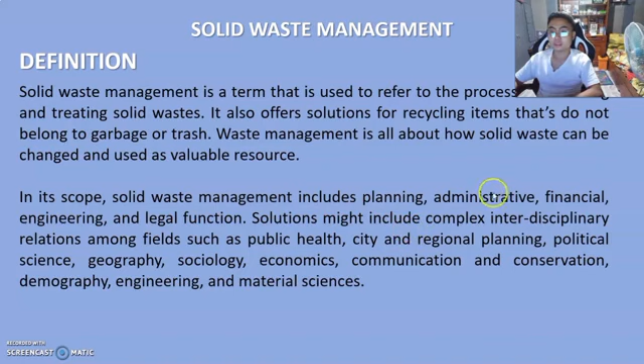Yan, mga usually non-recyclable. Its scope includes planning, administrative, financial, engineering, and etc.

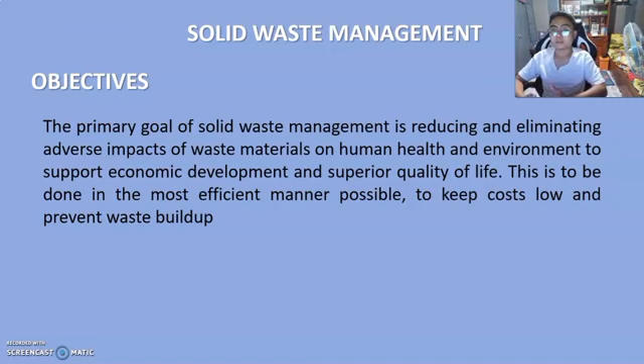There are 6 stages of the waste management system. The first is waste generation, where they identify materials that are no longer usable.

Next is on-site handling, storage and processing. Here, they have a dedicated place for solid waste to facilitate easier collection.

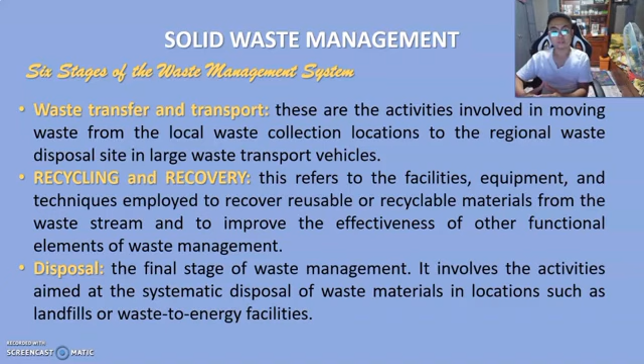Next is disposal, the final stage of waste management. It involves activities aimed at the systematic disposal of waste material in locations such as landfills or waste to energy facilities.

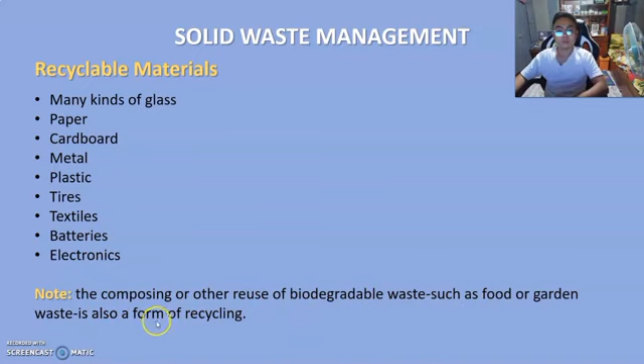Next are recyclable materials, the ones usually recycled: many kinds of glass, paper, cardboard, metal, plastic, tires, textiles, batteries, electronics. Note that composting or other reuse of biodegradable waste such as food or garden waste is also a form of recycling.

Next are non-recyclable materials: plastic bags or recyclables inside plastic bags, takeaway coffee cups, disposable nappies, garden waste, polystyrene or foam, bubble wrap, syringes or medical waste, dead animals, oils, ceramics, ovenware, or light bulbs.

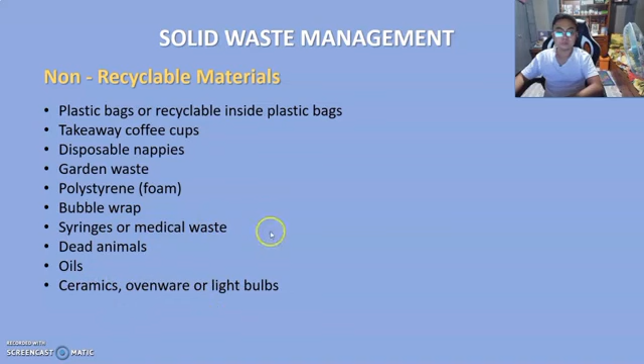Next is the benefits of recycling: it reduces the amount of waste sent to landfills and incinerators, conserves natural resources such as timber, water, and minerals, increases economic security by tapping a domestic source of materials, saves energy, supports manufacturing and conserves valuable resources, and helps create jobs in the recycling and manufacturing industries.

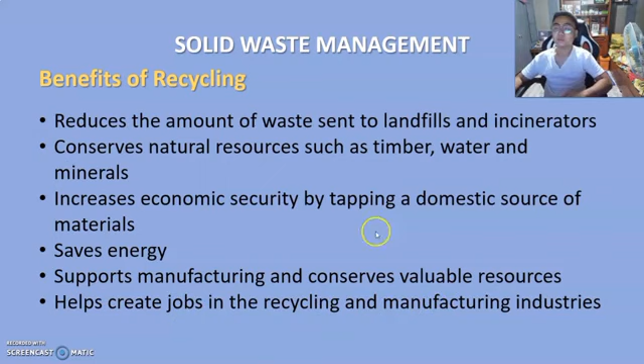Solid waste management accomplishes a lot. Next is the Philippine government. The Philippines has endeavored to improve the management of solid waste through the passage of RA 9003, or the Ecological Solid Waste Management Act, which provides for a systematic, comprehensive, and ecological waste management program to ensure the protection of public health and the environment. So the Philippine government improved our solid waste management.

Next, our topic is all about global warming and climate change. Global warming occurs when too much carbon dioxide and air pollutants are present in the atmosphere.

These pollutants get trapped on Earth and can last for years, even centuries, in the atmosphere. Because of that, they get trapped and generate heat, causing the greenhouse effect. Carbon dioxide, methane, nitrous oxide, water vapor, and synthetic fluorinated gases are known as greenhouse gases.

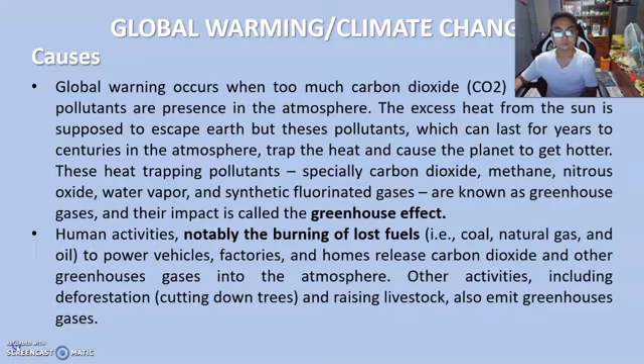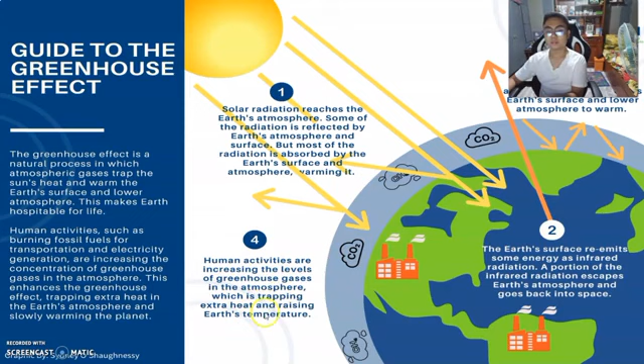Next is global warming and climate change impact. Because of human activities, there is an impact on our planet. This includes intense and frequent droughts and storms, melting glaciers and ice sheets, rising sea levels, warming oceans, and ocean acidification. People around the world are already feeling the impact of climate change on the environment.

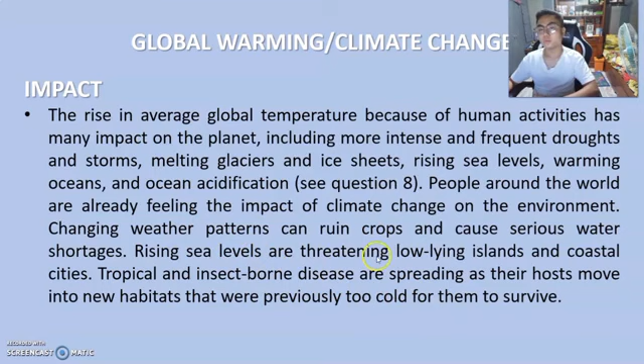Rising sea levels are threatening low-lying islands and coastal cities. Tropical insect-borne diseases are spreading as their hosts move into new habitats that were previously too cold for them to survive. Some insects are moving to new habitats because of the impact of global warming or climate change.

Next is prevention. Switch to renewable sources of energy such as solar and wind energy. Drive electric vehicles instead of those that burn fossil fuels, or use mass transit instead of driving our own cars. We know that our vehicles emit burned fossil fuels which are bad for our Earth.

Insulate our homes and buildings by replacing old, failing appliances with more energy efficient models. Next is invest in commercial services that draw down an equal amount of carbon out of the atmosphere, such as through planting trees and carbon capture and storage techniques.

Where practical, we can support more local businesses that use and promote sustainable, climate-smart practices such as those listed above. Consider placing an upper limit on the amount of carbon dioxide we will allow ourselves to emit into the atmosphere within a given time frame. Those are the prevention methods.

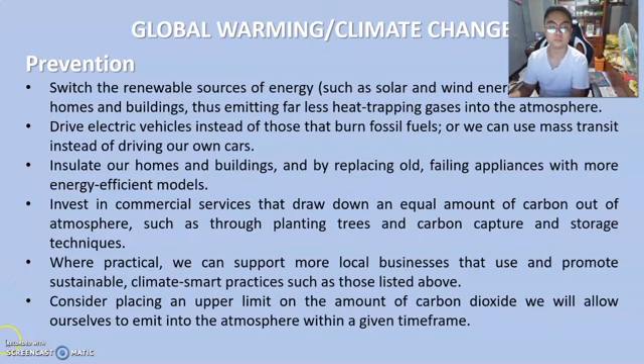Next is global mitigation. Here, 400 institutional investors which collectively manage over 24 trillion in assets wrote in support of the Paris Agreement, encouraging governments to expand low carbon fuel sources, establish a carbon price, and eliminate fossil fuel subsidies. In global mitigation, they make moves or ways to lower the greenhouse effect here on Earth.

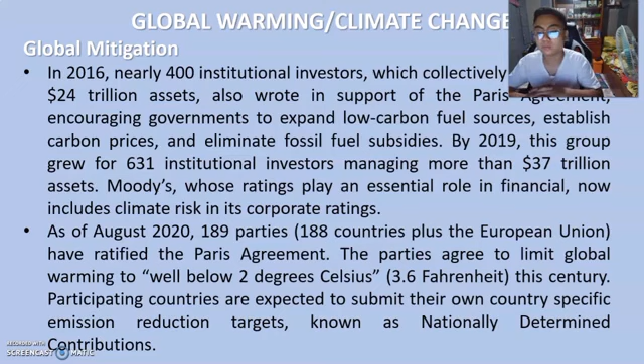As of August 2020, 189 parties have ratified the Paris Agreement. The parties agreed to limit global warming to below 2 degrees Celsius (3.6 Fahrenheit) this century. Participating countries are expected to submit their own country-specific emission reducing targets, known as nationally determined contributions.

Temperature data shows rapid warming in the past few decades, with the latest data going up to 2020. According to NASA data, 2016 and 2020 are tied for the warmest year since 1880.

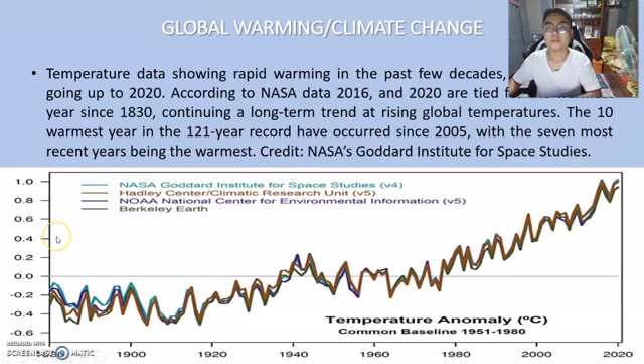Looking at the data over the years - 1880, 1900, 1920, 1940, 1960, 1980, 2000, and 2020 - we can notice that warming here on Earth is increasing.

Dams. A dam is a barrier that stops or restricts the flow of water or an underground stream. Reservoirs created by dams not only suppress floods but also provide water for activities such as irrigation and human consumption. The dam is what restricts the flow of the river, serving as a barrier to it.

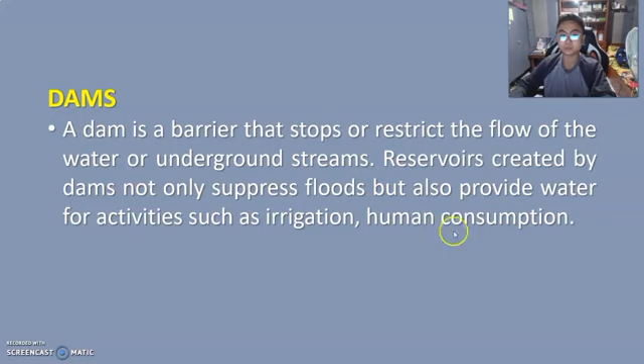Next is levees. Dike, embankment, flood bank, or stop bank is an elongated naturally occurring ridge or artificially constructed wall that regulates water levels. It is usually earthen and often parallel to the course of a river in its floodplain or along low-lying coastline.

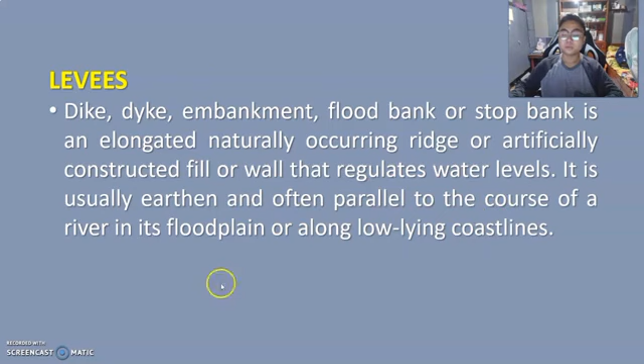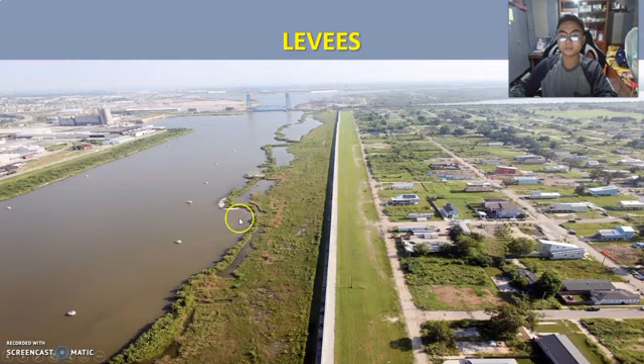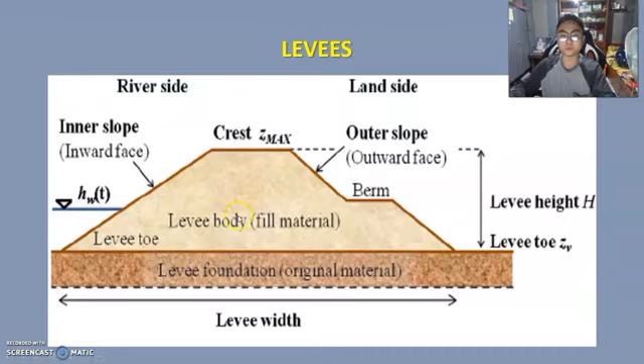So yung levees, siya yung nagre-regulate ng water levels, at often nakaparallel yung itsura niya. Para mas maintindihan natin, ito yung itsura nito. Parang nag-a-add siya ng space, or parang mas pinapalaki niya yung area ng river para ma-control yung flood. Nag-a-add din siya ng parallel at meron din siyang height, para yung area ng river ay mas lumaki, at mas hindi siya madaling mapuno. Ayan, yung embankment.

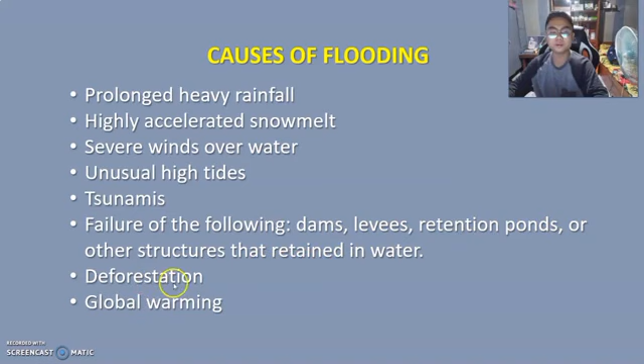Ngayon, punta naman tayo sa causes of flooding: prolonged heavy rainfall, highly accelerated snowmelt, severe winds over water, unusual high tide, tsunamis, failure of dams, levees, retention ponds, or other structures that retain water, deforestation, and global warming.

Next is flood wall. A flood wall is a primarily vertical artificial barrier designed to temporarily contain the water of a river or other waterway, which may rise to unusual levels during seasonal or extreme weather events.

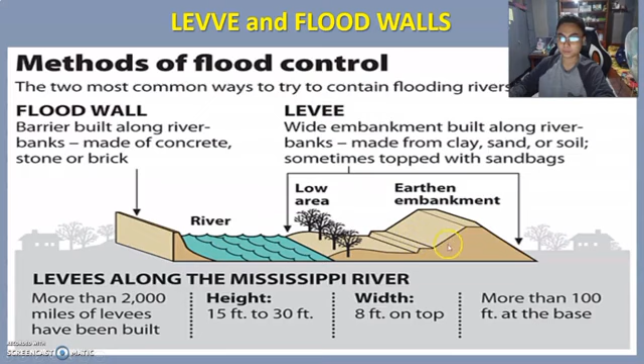Yung flood wall, unlike sa levees na nakaparallel yung barrier niya, ito naman ay naka-vertical yung artificial barrier niya. Etong flood walls ay ginagawa para ma-contain niya yung unusual level ng tubig, like for example sa mga tag-ulan, usually tumataas. So yun yung trabaho niya. Ito yung levees and flood walls, ito yung flood wall, at ito yung levee.

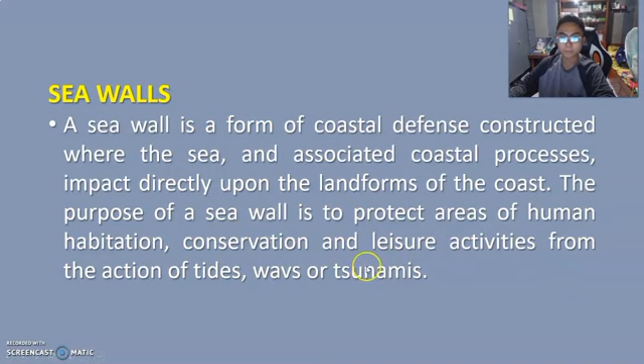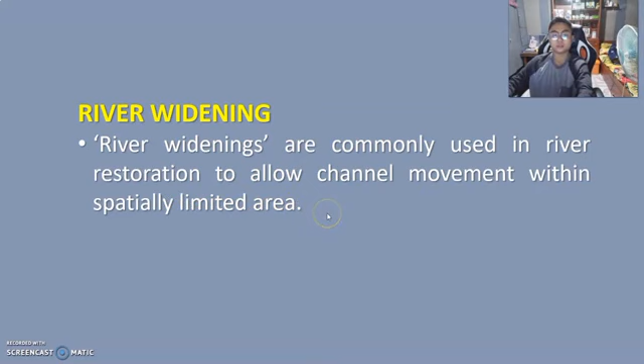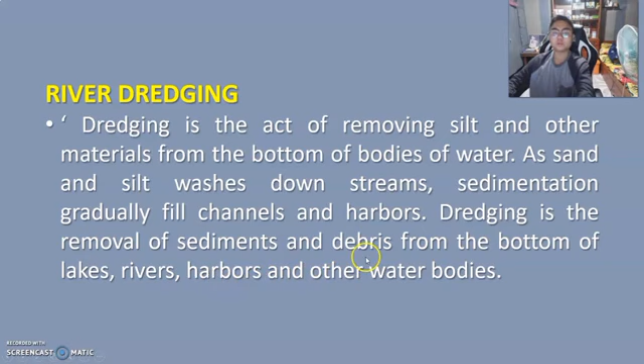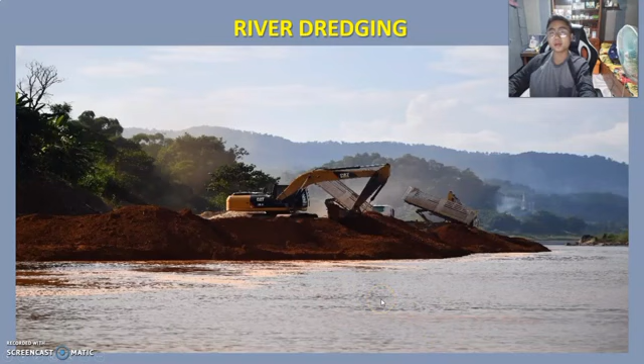Next is river dredging. Dredging is the act of removing silt and other materials from the bottom of bodies of water. As sand and silt washes downstream, sedimentation gradually fills channels and harbors. Dredging is the removal of sediment and debris from the bottom of lakes, rivers, harbors, and other water bodies. Ito yung pagkukuha nila o pag-ukay nila sa ilalim ng tubig ng rivers, like yung mga burak na naiipon sa ilalim. Ngayon ang tendency, madaling mapuno at madaling magkaroon ng baha. Kaya kinukuha nila yon para ma-minimize o ma-prevent pa rin yung pag-apaw ng tubig.

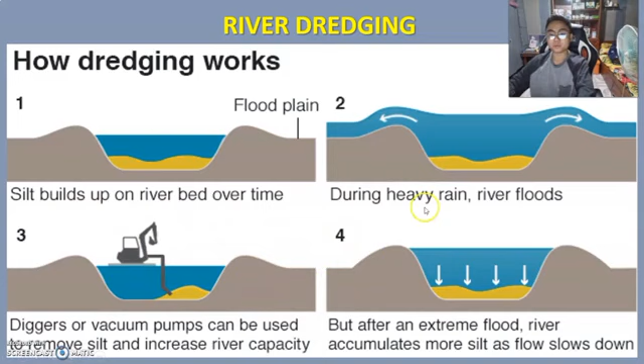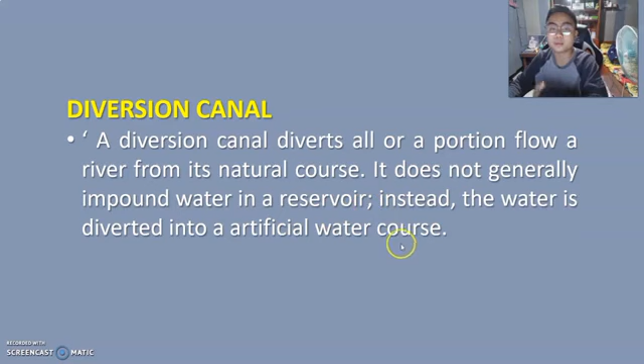Ayan, diversion canal. A diversion canal diverts all or a portion of the flow of a river from its natural course. It does not generally impound water in a reservoir; instead, the water is diverted into an artificial water course. Yung diversion, dinadivert niya, parang hindi ma-ipon lahat sa water reservoir yung tubig. Para mas maintindihan natin, ito yung ano niya.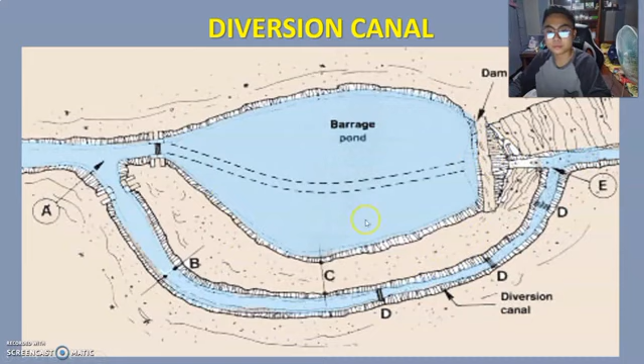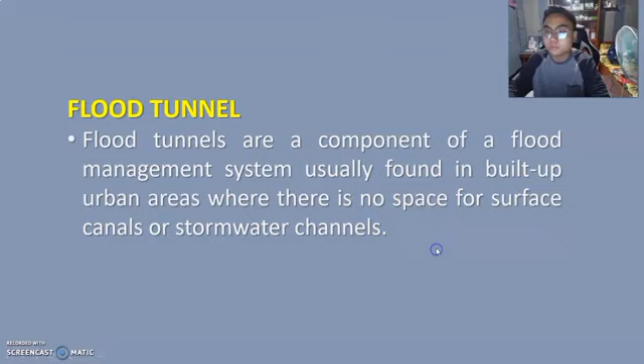Next is flood tunnel. Flood tunnels are a component of a flood management system usually found in built-up urban areas where there is no space for surface canal or stormwater channels. Yung flood tunnels, ito yung walang mga space para sa mga surface canals, kaya gumagawa sila ng flood tunnels para doon dumaan yung mga tubig. Halimbawa, Tokyo Underground Flood Tunnels.

Ngayon dumako naman tayo sa public water treatment and distribution. The stages of public water distribution are collection, screening and straining, coagulation or flocculation, sedimentation and clarification, filtration, disinfection, storage, and distribution. Sa collection, merong dalawang source ng water: surface water at groundwater.

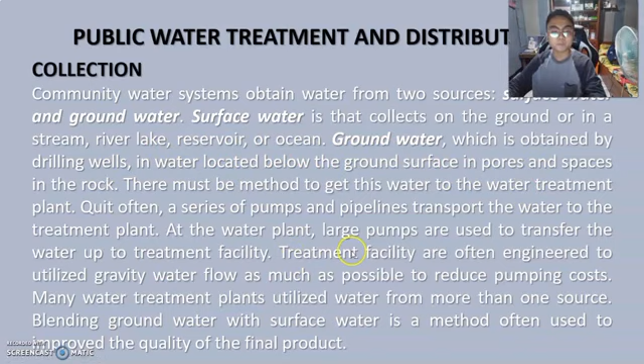Sa surface water, siya yung nanggagaling sa stream, river, lake, reservoir, or ocean. Sa groundwater naman, ito yung sa mga drilling wells, yung sa mga aquifer natin. Ayan, yun yung source of water natin sa aquifers, yung groundwater. Ito ay primary source of drinking water; porous consolidated rock or unconsolidated soil, groundwater fills space, well and pumps used to remove water.

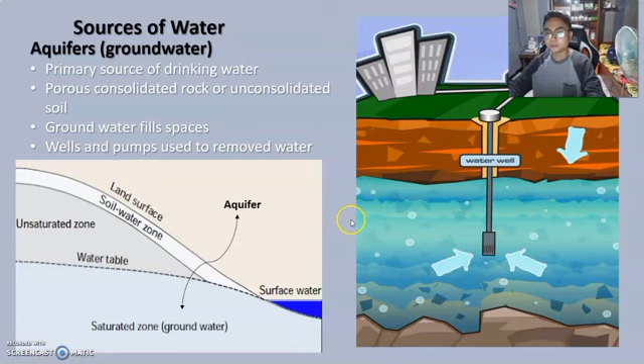Source of water: surface water, such as lakes, reservoirs, rivers, and dams create reservoirs that store water during heavy rains and snow.

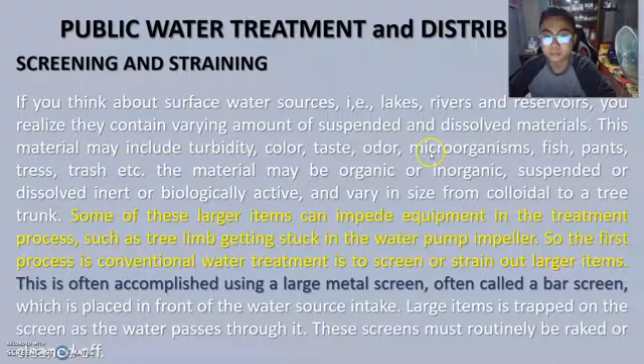Next is screening and straining, which is the process of filtering out dirt in the water. Larger items like plastic bottles and rocks are removed. Some of these larger items can impede equipment in the treatment process, such as tree limbs, and many more. This is an example of the screening device used.

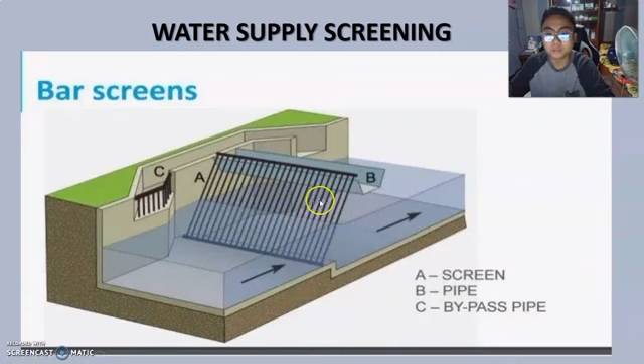Coagulation or flocculation: the coagulation process involves adding iron or aluminum salts such as aluminum sulfate, ferric sulfate, ferric chloride, or polymers to the untreated or raw water. When mixed with the water, this causes the tiny particles of dirt present to stick together, or coagulate. That's the job of coagulation or flocculation, to make the tiny particles stick together into larger particles so they are easier to remove. Here it is, already formed and easier to collect.

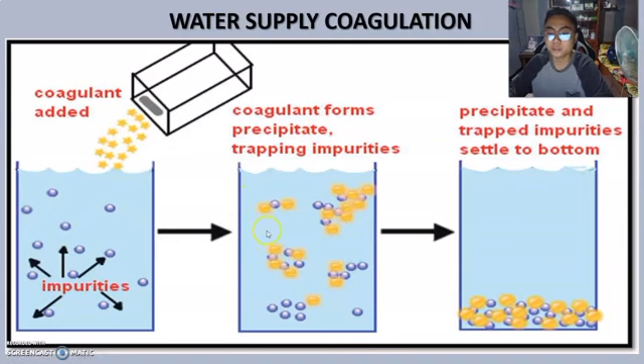Next is filtration. Clarified water enters the filters from the top. Gravity pulls the water down through the filters where it is collected in a drain system at the bottom of the unit. There are many different types of media used in filters, the most common being sand and gravel. Many conventional plants now use granular activated carbon as the media of choice because it not only provides excellent mechanical filtration of particulate matter, but also removes organic compounds which can cause taste and odor problems. That's what filtration does, to remove the odor and taste of the water.

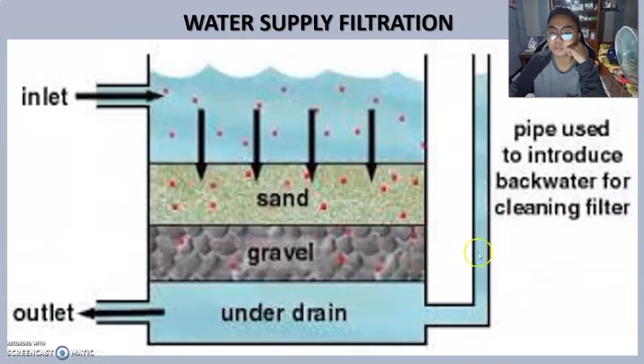Next is disinfection. Once the water has gone through the filtration process, it is about as clear as it can get. However, there may still be bacteria and viruses remaining. To ensure these are destroyed, there must be a disinfection process employed, so that remaining bacteria and viruses are removed.

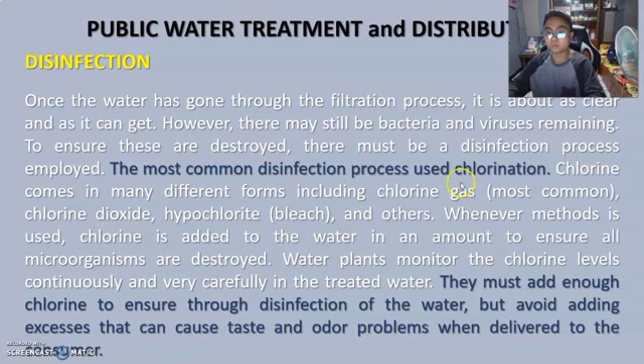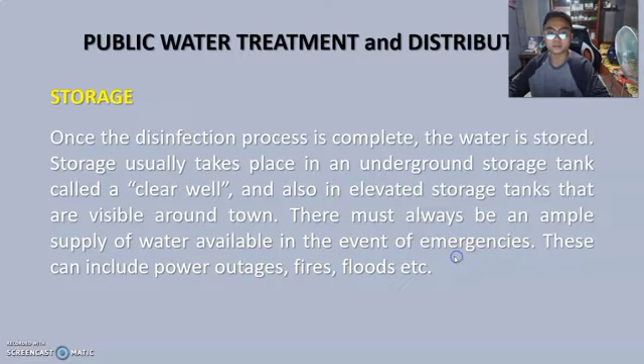Next is distribution. How does the water come out of your kitchen tap? The stored water is pushed through underground pipelines all over town in what is called the distribution system. The distribution system consists of large water pumps at the treatment plant, overhead water storage tanks, large pipelines, smaller pipelines, fire hydrants, valves, and water meters in your front yard.

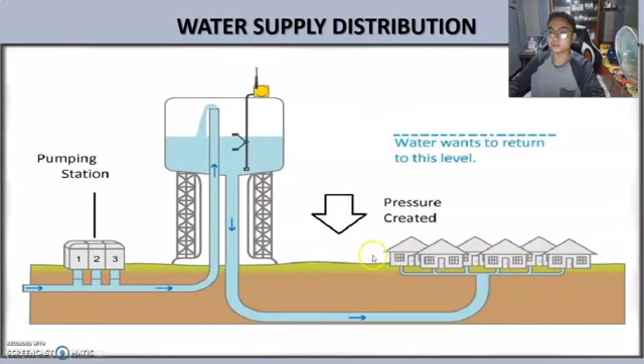So it starts with screening or straining, then coagulation and flocculation are added, then sedimentation, then filtration. After filtration comes disinfection, then storage, then supply.